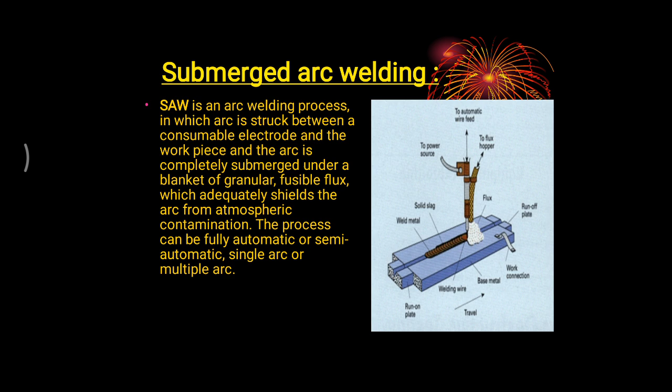So there is the equipment: a wire feeder drive, a rail for the horizontal movement, a welding power source, a flux hopper, and granules of the flux.

So remember class, one thing, this time also we have to use the dry flux, because if the flux is wet, it will result in welding defects. So what has been done, there is an oven, an electric portable oven or muffle oven, used to dehumidify the flux, and it has been kept overnight at a 200°C temperature to completely dehumidify it.

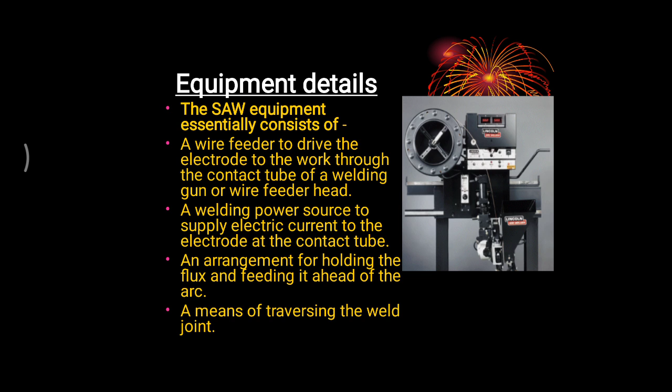So in SAW, the electrode has been defined as follows. The first digit, see the example, 7, indicates the minimum tensile strength. The next indicates the condition of the heat treatment in which the tests were conducted. The A sign stands for as welded, and the P stands for post-weld heat treatment.

And the 6 indicates the lowest temperature at which the impact strength of the weld metal meets or exceeds 27 joule. The next, E, stands for the electrode, the solid electrode. The next letter, M, refers to medium manganese content. It can be low or can be high.

The K stands for killed steel, and there is an IS code for killed steel. You can search anywhere what is killed steel, what is semi-killed steel. It is very interesting to learn.

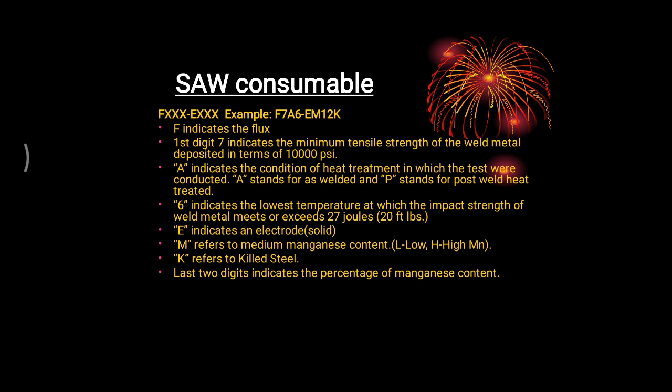Okay, so we'll proceed to the next slide: the advantages. I already told you, where arc welding needs several runs to complete the welding joint, the SAW process can do it in a single run. What is the result? Very fast welding and very large productivity can be achieved.

There is also no spatter generation, no smoke generation, and it's very minimal. There is a very high penetration rate, maximum 50 mm, and the welding is also very smooth and symmetric in major portions.

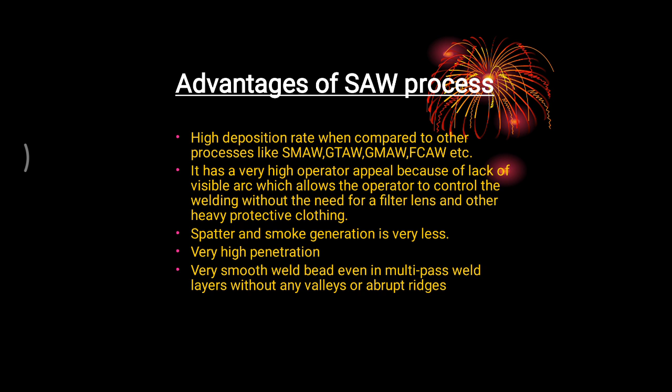Next, the limitations. As you already know, a very thin plate under 10 mm of thickness cannot be welded here. As I told you earlier, the operator can't see what is exactly happening in the joint because it is totally covered with the flux.

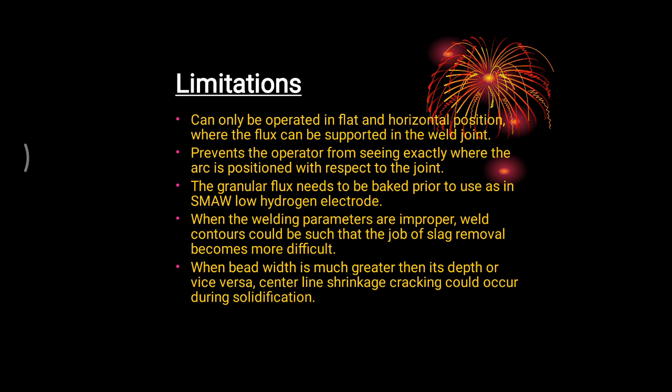The granules of flux have to be baked. This is a major limitation. The defects observed in the SAW process are: slag inclusion, porosity, cracking of welds, and incomplete fusion. Just note these terms. At the end I will explain the terms, then you can understand easily what is actually happening.

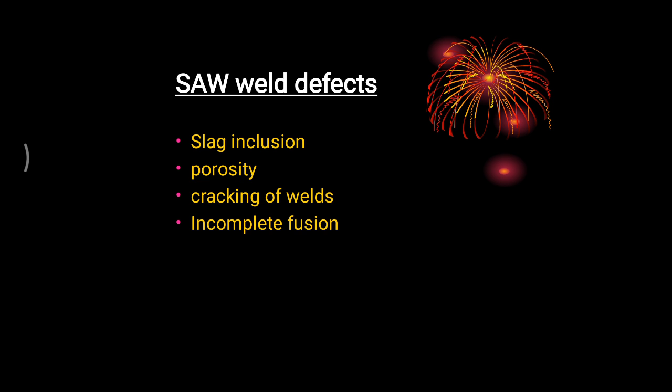The consumables: solid or cored wire, the granule flux.

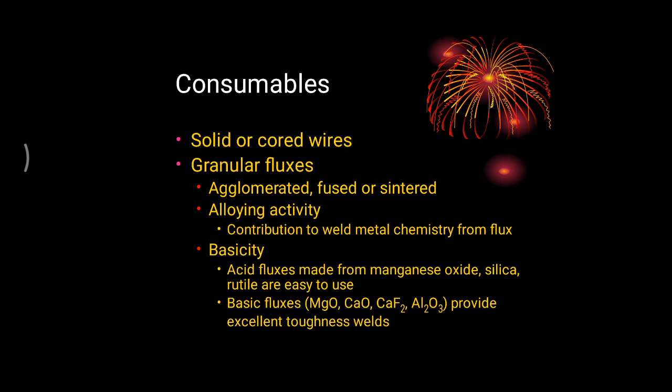Most interesting, the applications: long straight weldings in heavier materials, and we can find it in the fabrication of pressure vessels.

And we have LPG cylinders in our house, everyone has almost. So in the middle, the center of the cylinder, you will see a thick layer of metal that is embedded from the flat surface. So this cylinder also uses the SAW process.

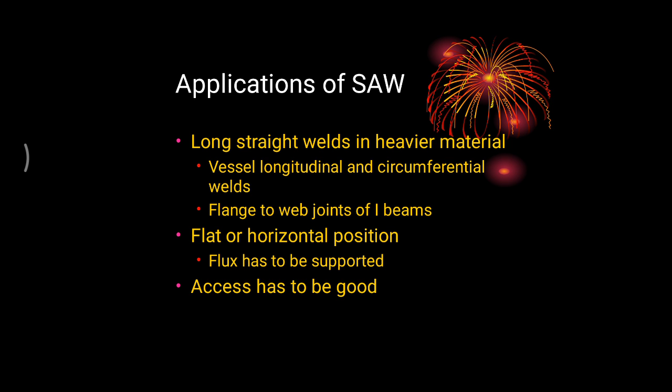Now we are entering into the gas section, the gas welding, where tungsten arc is used in a separate arrangement: GTAW, gas tungsten arc welding. Another name for it is TIG.

So it's a very sophisticated process, mainly used in joining stainless steel. Mind it, stainless steel is joined by the TIG process, and it falls under tungsten inert gas welding.

So see the arrangement: in one hand is the holder, in the other hand is the filler material. So the TIG welding has also 3 steps: DC straight polarity, DC reverse polarity, and AC welding. It is used mainly in joining aluminum and magnesium alloys in the automobile sector, aerospace sector, and chemical sectors.

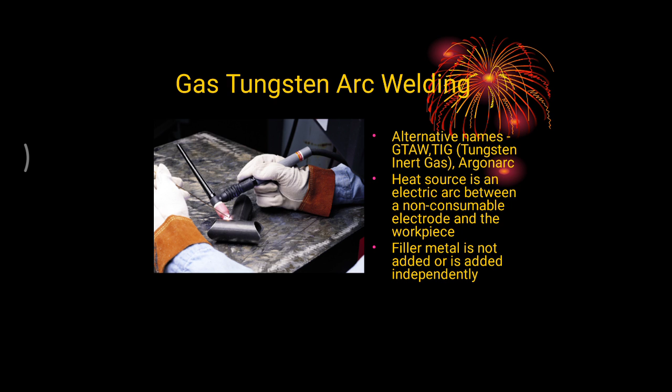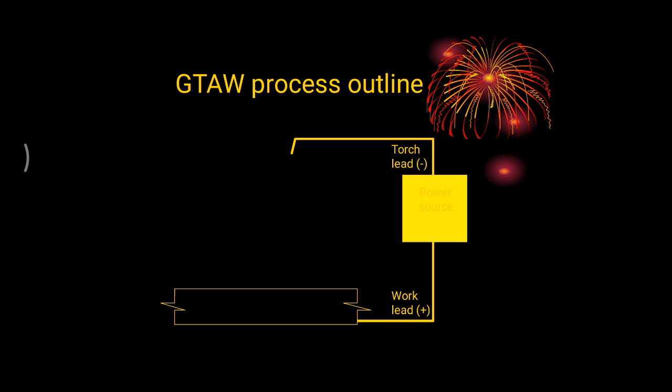Now the outline of the process. A power source is there as usual. The holder, the torch, is negative. The workpiece is positive.

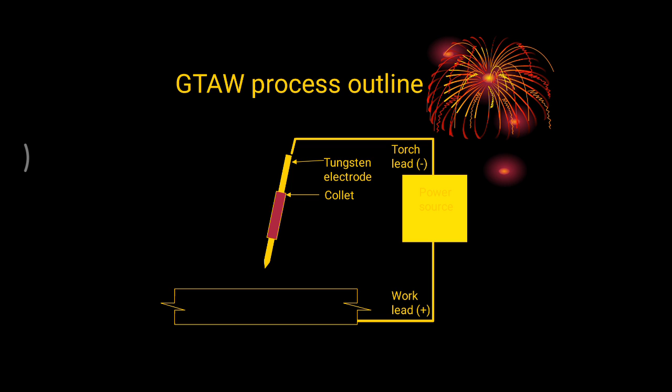So it is a non-consumable electrode. Mind that the electrode is not consumed, there's a collet for handling, and it is a total torch arrangement.

And the inert gas, most interesting: the arc is generated between the non-consumable tungsten electrode and the workpiece. For welding of less than 5 mm thickness of workpiece, a joint can be produced without using filler material. For welding of more than 5 mm thickness of workpiece, a joint can be done by providing filler material externally.

So here you can see one arrangement is missing, the flux material, neither in granules nor in coated electrodes. So the inert gas plays the same role as the flux, meaning it provides protection against environmental damage.

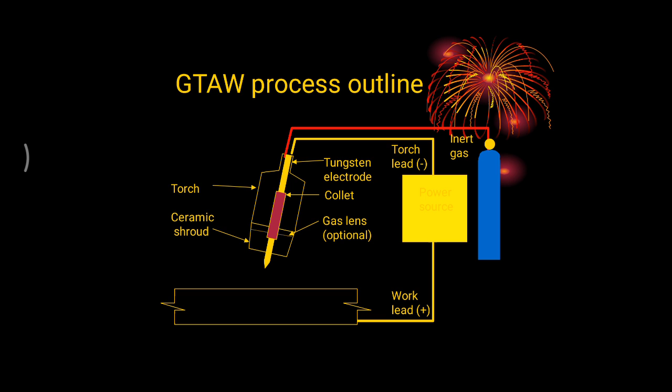Here the arc is blown, the workpiece is welded, and from the two sides, the flow of inert gas, it can be CO2 or any inert gas, creates a protection layer that helps it not to oxidize.

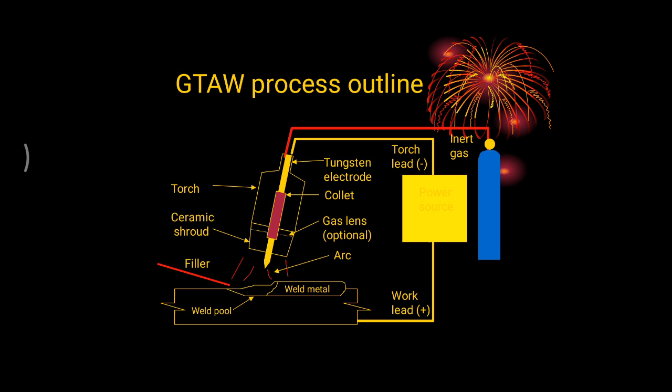The filler material is needed if the plate or workpiece is more than 5 mm thick, otherwise it's not required. So it needs a power of almost 80 ampere and 11 volt. It's ideal for the root runs in pipes or thin sheets. The productivity is low, the deposition rate is 0.5 kg per hour.

The process is clean because there is no slag generation. And the profile finish - I personally prefer the profile finish of TIG welding. It's very nice.

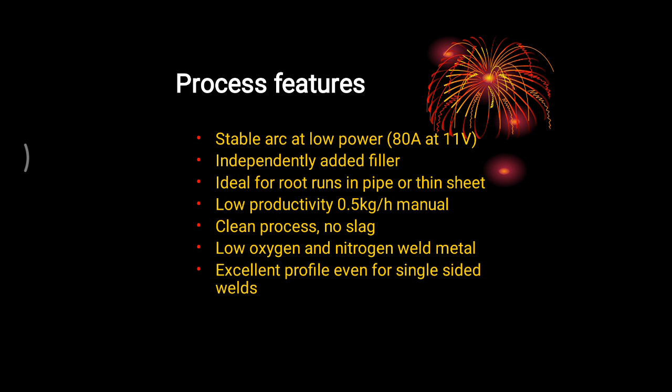Already discussed in the picture what arrangement is required for that. The shielding gas can be argon, a mix of argon and helium, or carbon dioxide. And the electrode used is the tungsten electrode.

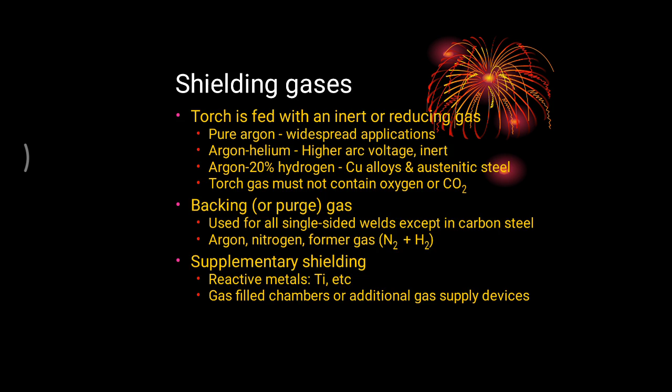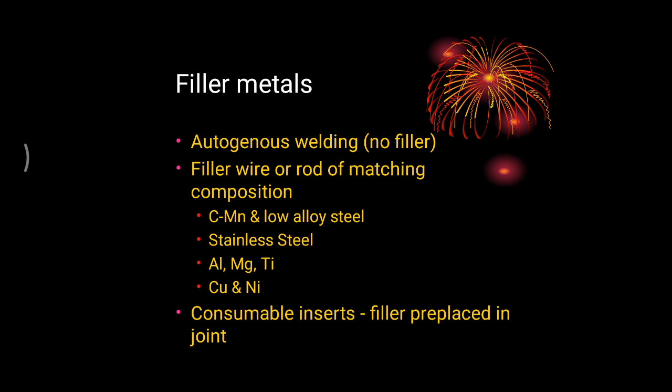Now it's time for the filler material. Less than 5 mm, it is autogenous welding, and if more than 5 mm thickness, it can be carbon manganese and low alloy steel, or stainless steel, or aluminum, magnesium, titanium can also be welded.